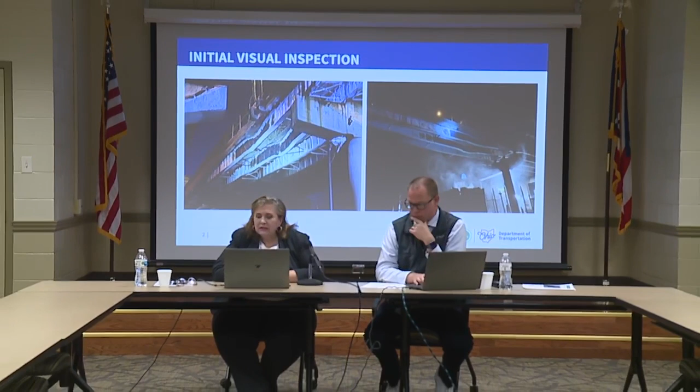In the first couple of slides, you're going to see some of our photos from ground level and snooper inspections that were conducted on day one. The team of structural engineers and inspectors determined very quickly that the bridge was not stable. We used drones and a robot dog to capture additional images that would be used in mapping the damage and collecting measurements, while plans were being developed for shoring towers to be installed so that up-close, hands-on inspections could be conducted.

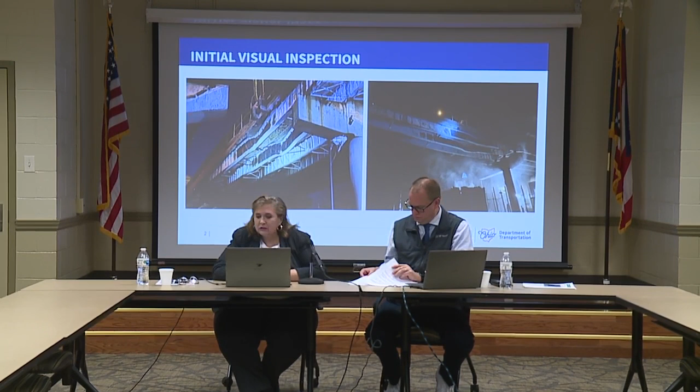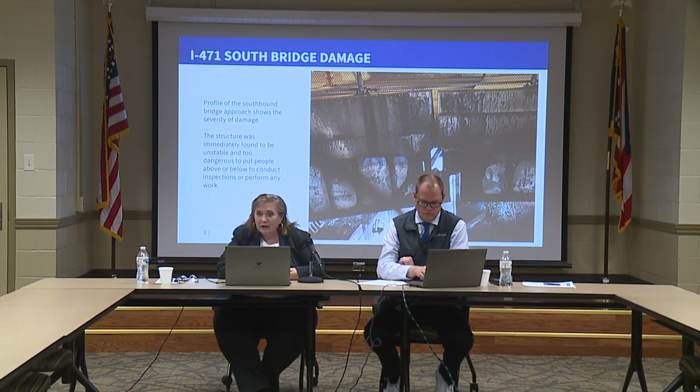If you want to show them the next slide. This is one, if you look at this and see the profile, you can look very closely and see the amount of damage that they were able to see day one. And if you look at that, you can tell just how severe that is.

So Matt, there's a couple of side shots of the girders that you can see the bent, how things are warped and bent. So obviously this fire produced a significant amount of heat to be able to cause this damage.

All right, great, thank you. So with the structure being unstable, we realized it was too dangerous to put people above or below the bridge to conduct a full inspection or begin any restoration work. Shoring towers would need to be installed to stabilize the approach spans in order to conduct the necessary inspections to determine the full extent of damage and the repairs.

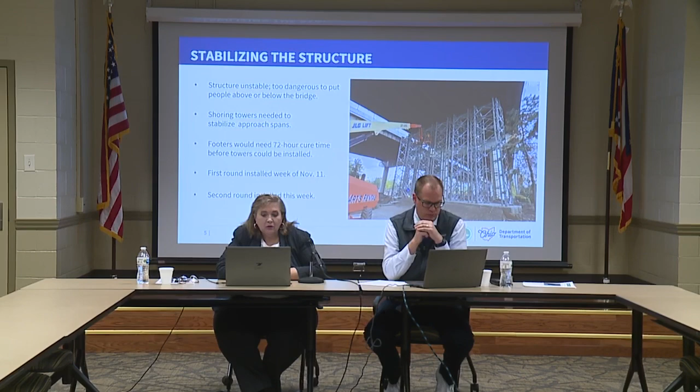Prior to the installation of shoring towers, a footer would need to be poured. The concrete foundation measured 65 feet by 15 feet and 3 feet thick, and it required about 15 truckloads of concrete to complete.

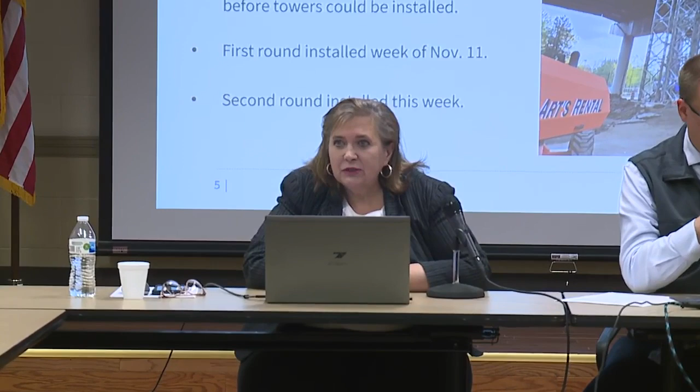That concrete was poured on November 8th, and it took 3 days, 72 hours, for it to cure before the towers could be installed.

So the first round of 6 shoring towers were installed during the week of November 11th, and those are being used to stabilize that north span, span number 4, which allowed for those hands-on, up-close inspections to take place, which they did on Friday of that week as well as on Saturday.

Our structural engineers and our team of inspectors were out there back-to-back days, long hours, both days, conducting those inspections and gathering materials that they could send off for sampling and testing to really understand the extent of damage and how much would be required to repair the structure.

Let's see what... Yes, here we've got some additional photos that show you the concrete footer that was being installed, and crews installing one of the shoring towers.

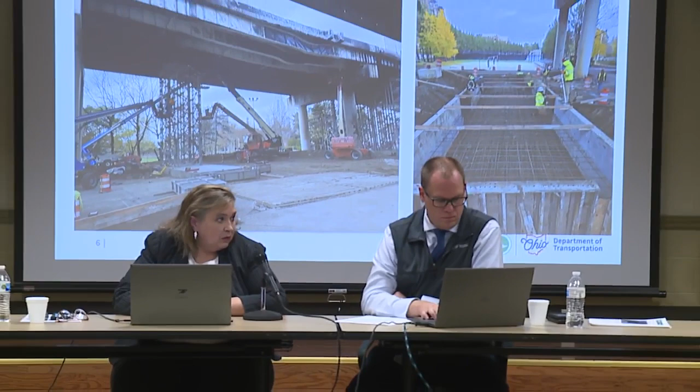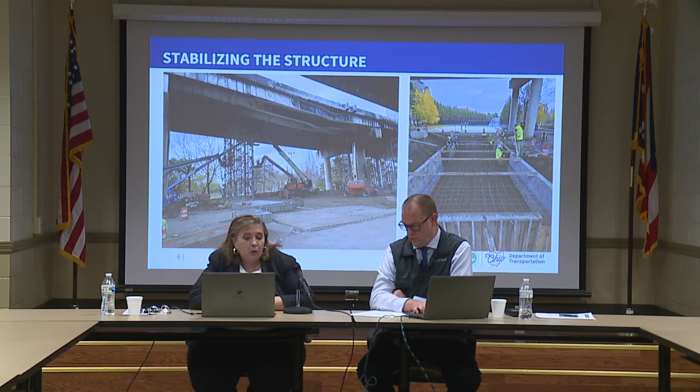So again, while those towers were going up and inspections were being conducted, at the same time, ODOT and its contractors, Great Lakes Construction, were working on the demolition plans. Go ahead and flip to the next slide.

So demolition of the damaged section of highway is not typical. This is atypical, not a standard type of demolition. Crews can't simply go in and saw cut the concrete bridge deck, remove the damaged concrete, and then cut the damaged steel beams and remove them, which would be a standard demolition.

So we had to develop very specialized, detailed plans. Several of the steel beams were deformed, as you've already seen in some of those photos, and those beams had detached from the concrete bridge deck. There was no support, basically. The bridge deck had completely warped in this area, so again, no stabilization, no support for the deck on top of those girders.

For those reasons, we simply couldn't start dismantling the damaged portion of the bridge. That just wasn't going to happen. We knew that we needed this detailed demo plan, so for the last couple of weeks, that is what our crews, our folks have been working on.

The plan for removing just the concrete deck details everything from where the cuts should be made, to where equipment will be placed, and how to safely offload the weight from that warped deck. This will be a very systematic approach to demolition, and some of you will hear us use the term surgical.

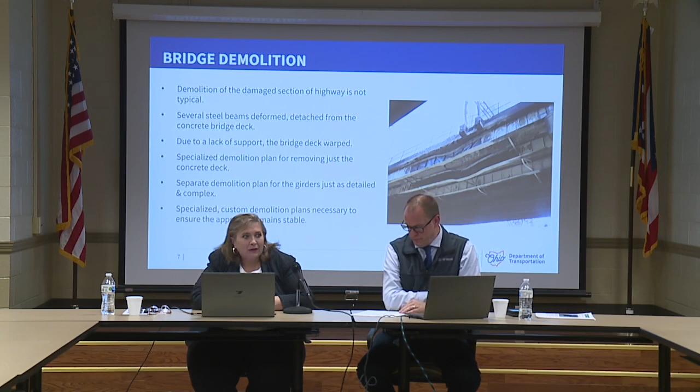It's going to be like a surgical, very systematic approach. So we're not going to see things come down and lower in one fell swoop, a term I like to use. It's not going to just be lowered very quickly. It will be cut; there will be different segments cut at different areas.

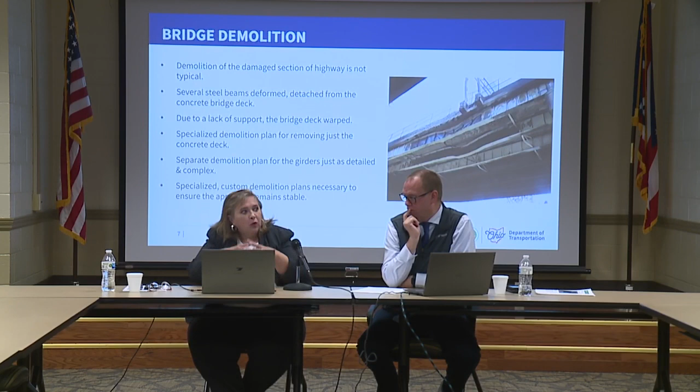The way they will do it actually will be drilling and pecking holes into it to break it up into smaller pieces where those girders are the most severely damaged, and they will remove the smaller segments and then work toward bigger segments. They won't be working all in one place; it'll be kind of scattered around as they do this.

Let's see. Yes, and of course we have to be very careful.

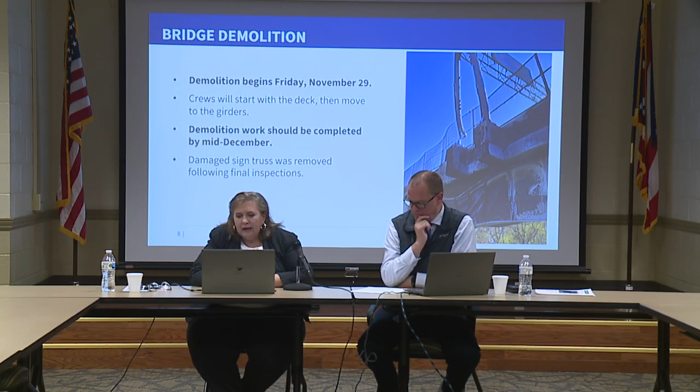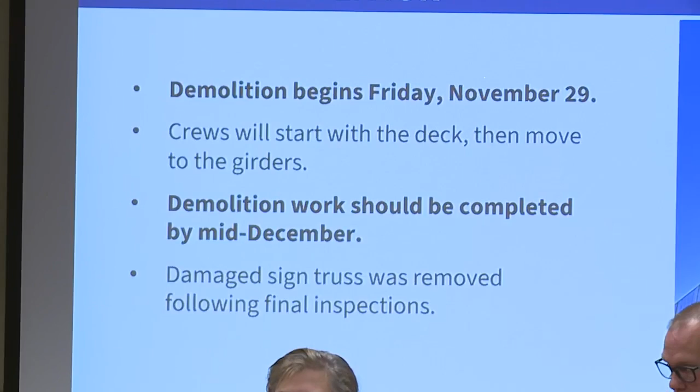We have to be mindful because we don't know how the rest of the structure is going to react as we start removing that deck, as well as the beams. So we have to be very careful not having a deck that's supported, having these compromised beams. We have to be very careful.

That is one of the reasons why we installed the additional 3 shoring towers this week on the south span, which would be span 3. We installed those to give us additional stability.

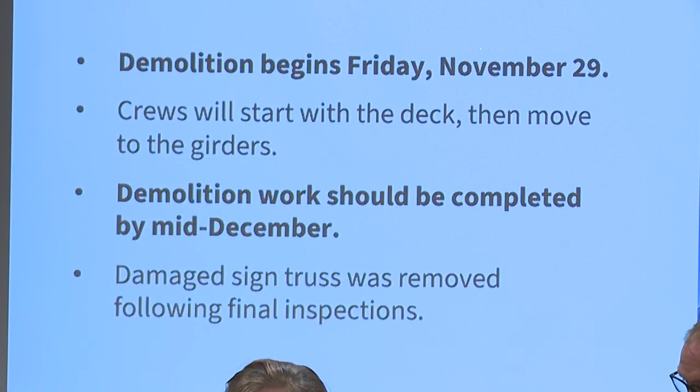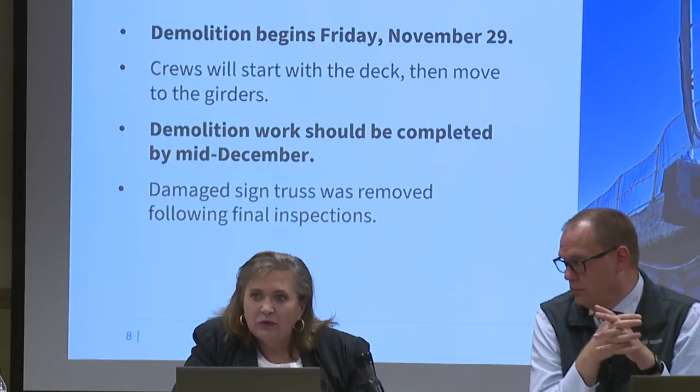One of the things we've talked about is that we've had to have a separate demolition plan, not just for the deck but also for the girders, because both of these are going to be very detailed and complex. In one of our releases we put out that just for the concrete deck alone, that plan was more than 200 pages. I haven't read it all, so don't ask me a lot of questions about that, but it is highly detailed.

Going back to what I said in the beginning, 3 years to do a project like this, and we've accomplished this plan and this design in just a matter of a couple of weeks. Demolition does begin this Friday, and it will take approximately 3 weeks to get through.

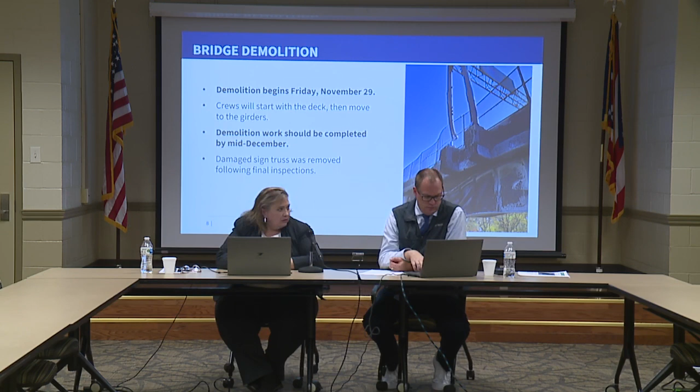Demolition takes about 3 weeks, so probably middle of December we should have the concrete deck and the girders down.

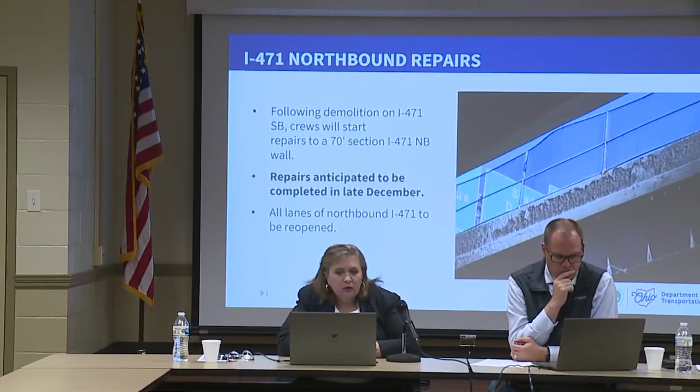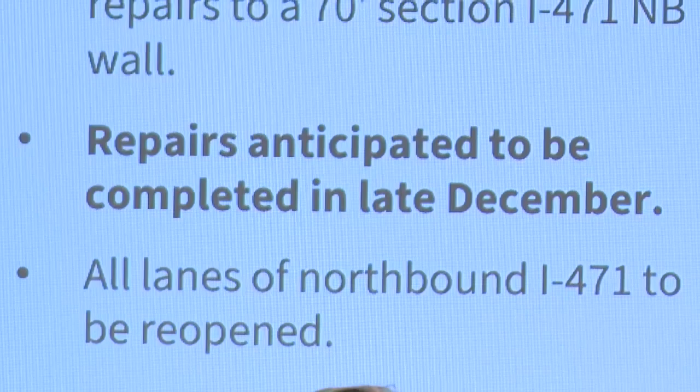Once that is completed, crews will repair the wall, the parapet wall along the left side of the northbound I-471 bridge, which we've had the single lane restriction in place since the closure of southbound I-471. Once we get the repairs made to the parapet wall, we will have that completed hopefully by the end of December, and at that time we can reopen that single lane closure on northbound 471.

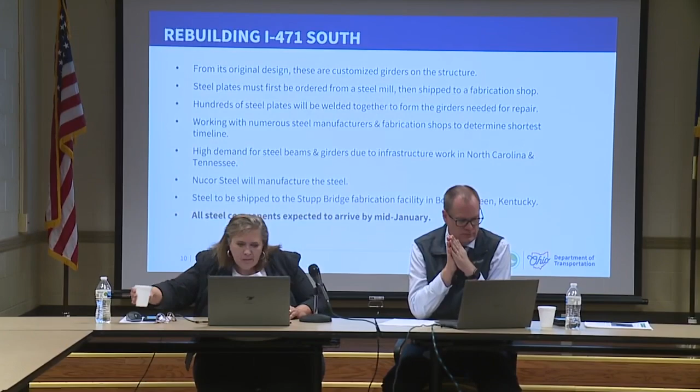While they've been working on the demolition plan, we've got one lane, pardon the pun, working on the demolition plan. We also have another lane of folks working on the design for the repairs. That's where a lot of people have been asking us about that timeline. We haven't had that repair plan fully implemented yet.

The repair plan itself is very complex and very detailed. The design of this bridge is unique. These are customized girders on the structure, so we're not looking at off-the-shelf materials that we can simply order from a supply catalog. I've talked to several of you about that already, so you're going to hear us repeat that a few times probably.

These steel plates that make up the girders must first be ordered from a steel mill and then shipped to a fabrication shop. Hundreds of steel plates will then be welded together to form the girders needed for repair. The repairs will also require custom-made bearings and expansion joints. So again, not off-the-shelf, big box store kind of construction. Everything has to be custom-made to make these repairs.

Over the last couple of weeks, ODOT and Great Lakes Construction have been working with numerous steel manufacturers who operate more than 20 fabrication shops to determine the shortest timeline for us. However, bear in mind there is high demand for steel beams and girders due to the infrastructure work taking place in North Carolina and Tennessee since Hurricane Helene this fall. So not only are we in competition with that, we're also in competition with all the construction projects around the country where these companies have already contracted with various DOTs and agencies to fabricate their materials. We are in competition for materials. Makes it very, very challenging.

And I know you've heard the term 4 girders was the last number we put out. I know it's hard to see on this, this is just a shop drawing from one of our engineers. There's actually 7 girders. Think of it like this: there were 3 long girders side by side, and then a 4th. Those 3 are basically 2 sections each, with a splice joint in there. So it's 1, 2, 3, 4, 5, 6, 7, if that makes sense. So 7 girders in total, measuring 556 feet in length.

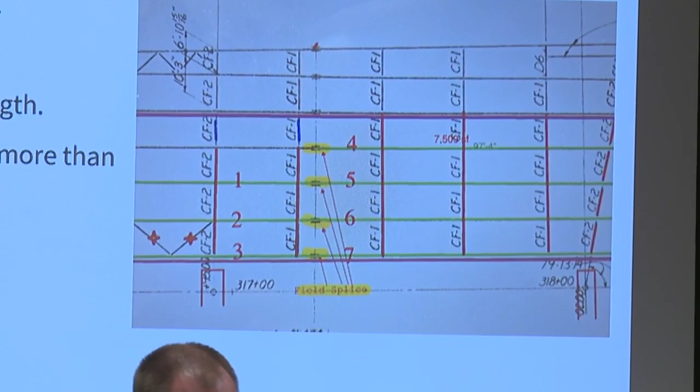We're also going to be pouring a new concrete deck and the side, or parapet, walls. It's going to be more than 7,600 square feet of deck to be replaced. So, 556 feet of steel girders and more than 7,600 square feet of deck to be replaced.

And of course, we will be installing the new sign truss. I think I failed to mention that sign truss did come down - we took it down. It was removed following the inspections, once we were able to get up there. And the shoring towers, of course, have been installed to give us that stability.

Okay, so I know what you've all been waiting for - you've been sitting here very patiently for the last 15 minutes, waiting to hear what that timeline looks like. Construction is anticipated to begin in January. All work is expected to be completed in early March.

Please, it is very important that you keep in mind that the schedule for completion will be contingent upon several factors: the delivery of materials, specifically those steel girders, as well as equipment, and the weather. We will be working during the winter months, and so we are beholden to Mother Nature. I think you all know that - we talk about it a lot in Southern Ohio.

It's important to understand that every situation is unique, and not every situation has a playbook. By no means does the damage to this bridge and the repairs needed to reopen it have a playbook. So it's going to take time to get it restored to traffic. We are wholly committed to repairing the bridge in the safest manner possible, as quickly as possible.

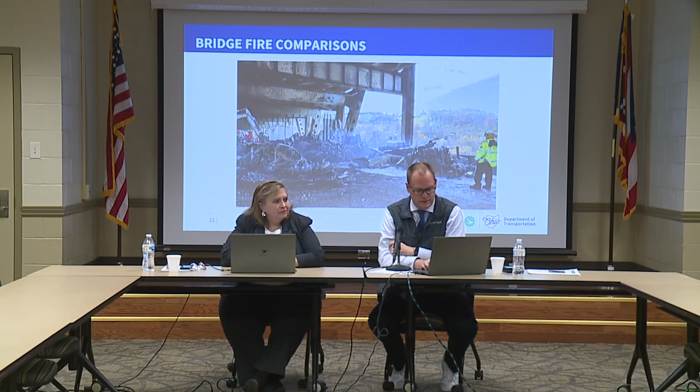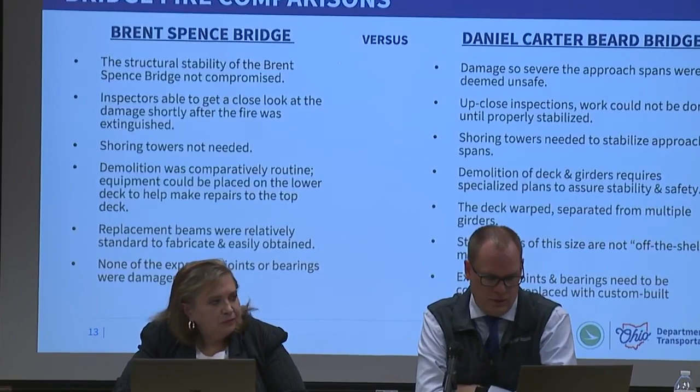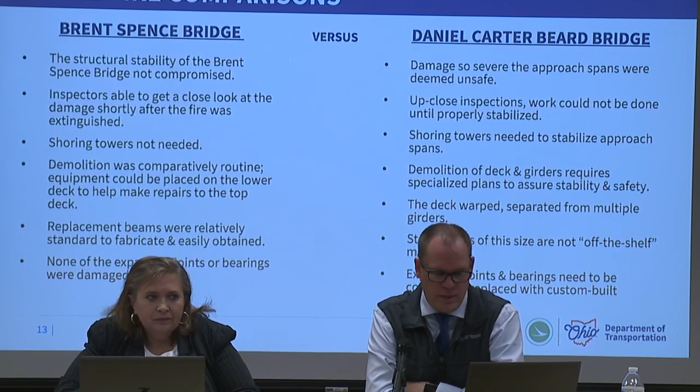For those of you who can see the screen here, there are a couple of the key differences between Brent Spence and the 471 incident. I'll highlight a couple of the key points: unlike 471, the stability of Brent Spence was never really an issue, so that meant they did not need shoring towers to get that work done. Removing the damaged sections of the bridge was a lot more like a typical demolition than what we're dealing with here on 471.

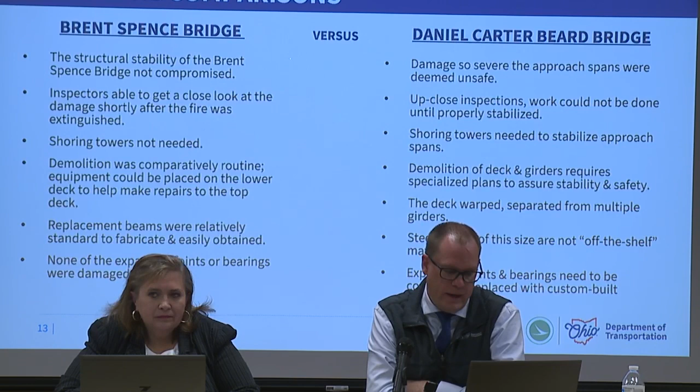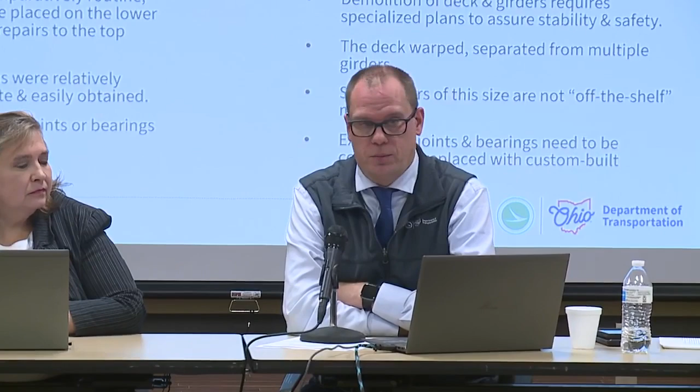This section of 471 was extremely unstable as a result of the fire. Several steel components, as Kathleen mentioned, had been completely separated from the concrete deck, and this made it really impossible to properly inspect that structure until all of that was stabilized. This bridge is uniquely built. Also, as Kathleen mentioned, there's no off-the-shelf items that we're going to be able to use - this is all having to be custom made.

Brent Spence had steel that was called stringer beams, which are a little more standard and easier to obtain. They still had to be obtained and fabricated, and our partners at the Kentucky Transportation Cabinet did an amazing job getting that bridge reopened in 41 days. This is just not a standard bridge like that one. So there are a lot of differences between what happened on Brent Spence and what happened on 471 that certainly make this a longer timeline to get reopened.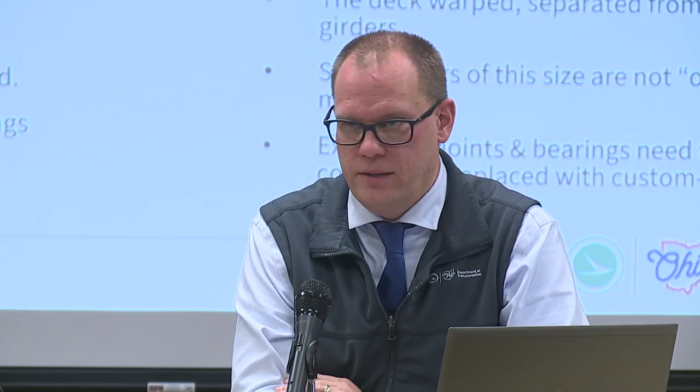Again, everything is very atypical on this one. This is just not a typical situation at all. So that timeline is going to be longer and the recovery time is going to be longer.

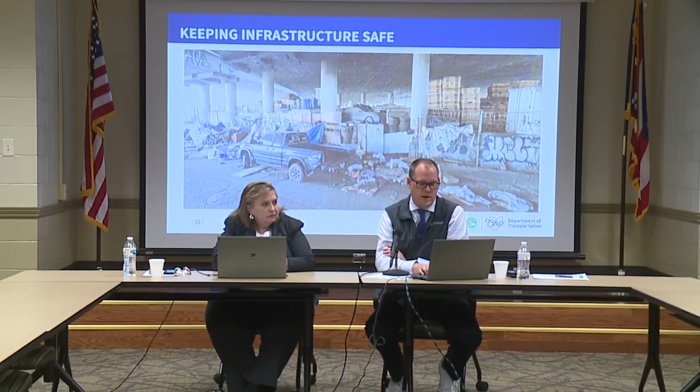The next thing I want to talk about is we've gotten a lot of questions about a federal memo that came out from the Federal Highway Administration asking states to look for flammable materials being stored under bridges. This memo was actually in response to a fire under I-10 in Los Angeles back in 2023.

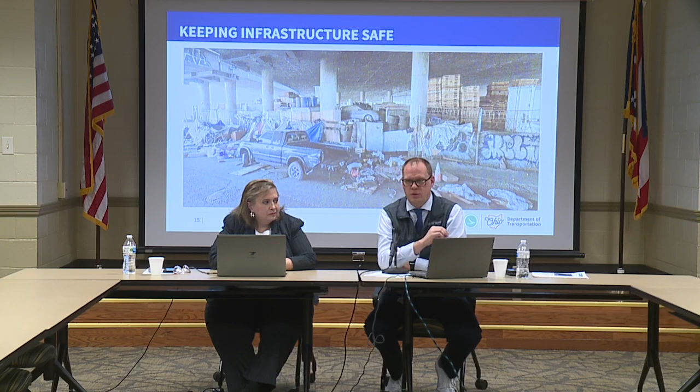You'll see behind me a Google Street View image. This is what was under that bridge in Los Angeles on I-10. You'll notice there are a lot of flammable materials like wood pallets, trash, a couple of abandoned vehicles, and construction materials, all stacked up really close to the bottom of that bridge. That is what states were asked to address, and we did.

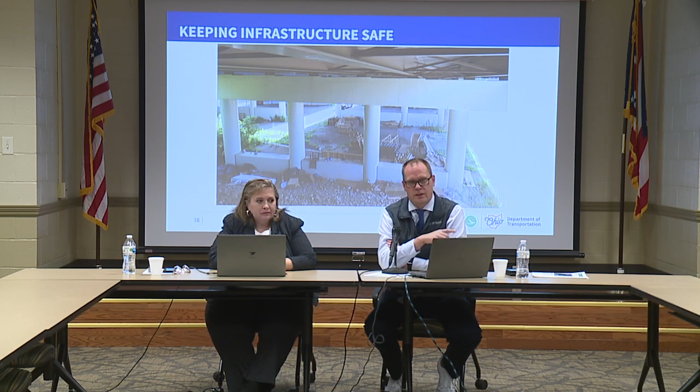Not only did we respond to that memo, but this image is actually under US 50 in Cincinnati. This was found by an ODOT crew and removed in 2018, five years before the I-10 fire. You'll notice a lot of items similar to what you saw under I-10 — wood pallets, construction materials, trash. These things were removed by ODOT, and this isn't the only thing.

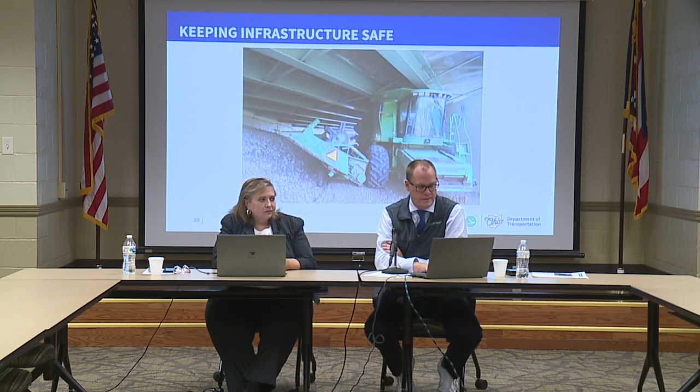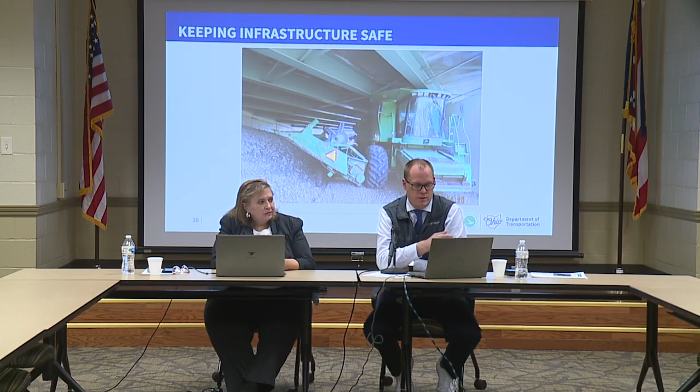Last image here, this is actually a farm combine under I-75 in Butler County. Again, the biggest concern here would be how close that is to the bottom of the bridge, so that if something were to catch fire, that heat would be very close to those steel beams. That was certainly a big concern for us, so we were able to get those items quickly removed.

This is something we've been doing for quite some time, not just in response to that federal memo in 2023 — we've been very proactive. And once that federal memo came out, we quickly sent it around to all 12 of our ODOT districts with their bridge engineers and said, try to find us some things that are responsive to this memo. I've highlighted some of those examples for you.

Another question we get a lot is, how much will this cost? Because this is an emergency project, we do not yet have a figure for that. That will be determined at the end of the process. Obviously, it's safe to estimate this will be in the millions of dollars. ODOT will foot the bill initially, and then, thanks to Governor Mike DeWine's emergency declaration issued shortly after the fire, we will then be able to pursue federal reimbursements for those costs. That is how an emergency project typically works, certainly how this one will work as well.

The last question we've been asked a lot is, what caused the fire? I want to be very clear: Cincinnati Fire will answer that. This is not a question for ODOT to answer. We are working on repairing the bridge and getting it reopened.

At the same time, Cincinnati Fire is doing their investigation into the fire. We do not have a timetable, and we have not heard a timetable from them. But what we do know is that we are confident they are going to get this right.